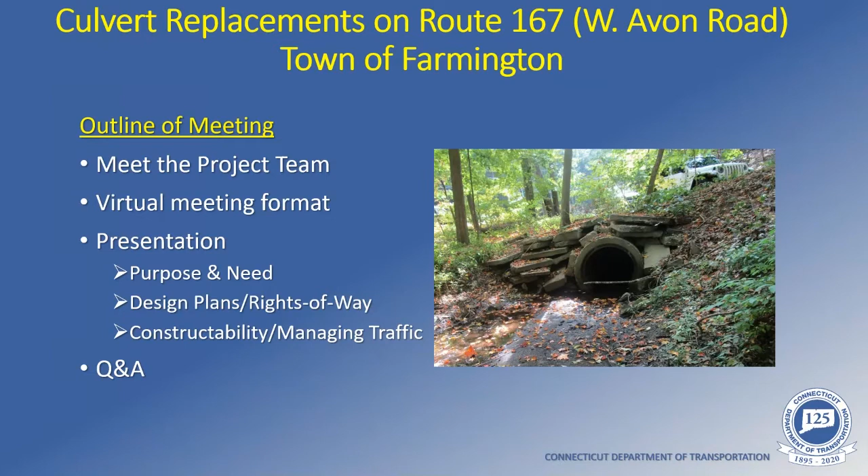The Department of Transportation representatives for this project are: top left, Mr. Matthew Vail, Principal Engineer, Highway Design; top middle, myself, Scott Bushee, Project Manager, Highway Design; top right, Mr. Matthew Giannakopoulos, Project Coordinator, Office of Rights of Way; bottom left, Mr. Byung Kim, Project Engineer, Highway Design; bottom middle, Mr. Albert Yelda, Project Designer, Highway Design.

An opportunity to ask questions will be held at the end of tonight's presentation. There will be 3 ways to submit questions to the project team: by email, by phone, and MS Teams chat. At the end of the presentation, I will cover the email address, the phone number, and procedures for using MS Teams chat to submit your questions.

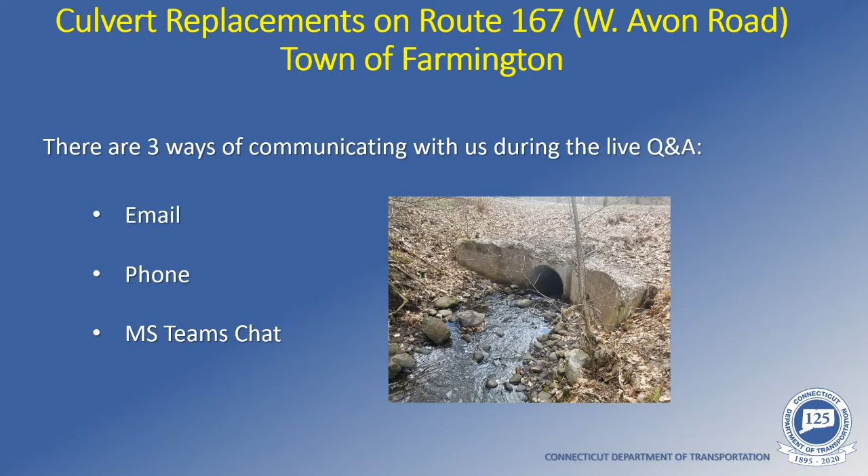The design of this project, including tonight's meeting, is being held in conformance with Title VI Civil Rights. We have a feedback survey that would be appreciated if you have the time to complete it following the meeting. It's located at www.surveymonkey.com/r/95JC8DT. We also have a civil rights flyer available with additional information if anyone's interested, which can be found on the DOT website. No person shall, on the basis of race, color, or national origin, be excluded from participation or subject to discrimination in the development of this project.

The culverts being replaced are located on West Avon Road, Route 167, just north of Route 4 in the vicinity of the Farmington Lions Club.

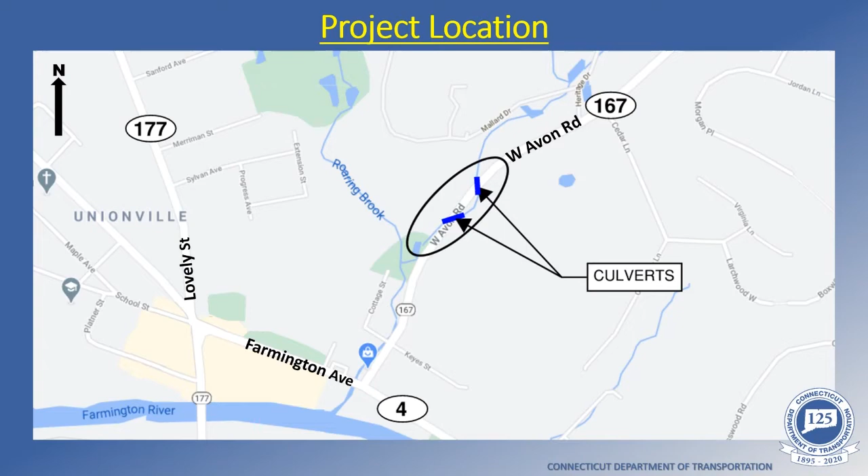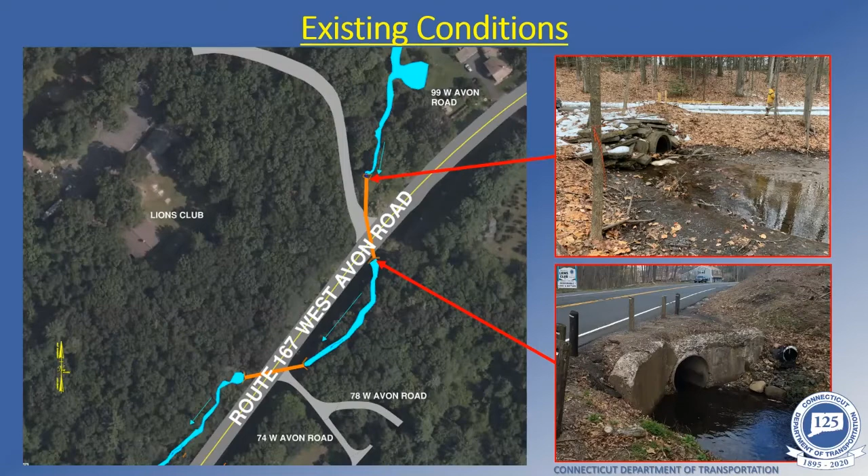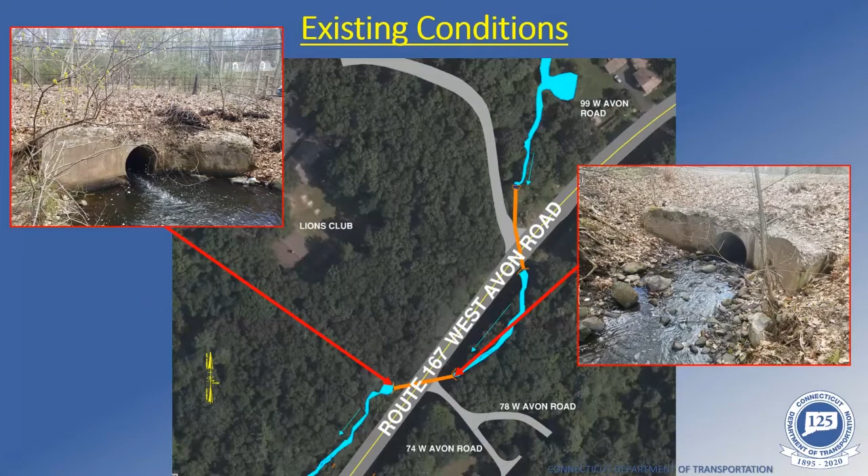The downstream culvert, the southern location, is in the vicinity of number 74 and 78 West Avon Road. This slide shows pictures of the culvert inlet and outlet, both head walls obviously spalled and deteriorated concrete needing replacement. This project is intended to alleviate the severity of the flooding as well as address maintenance needs.

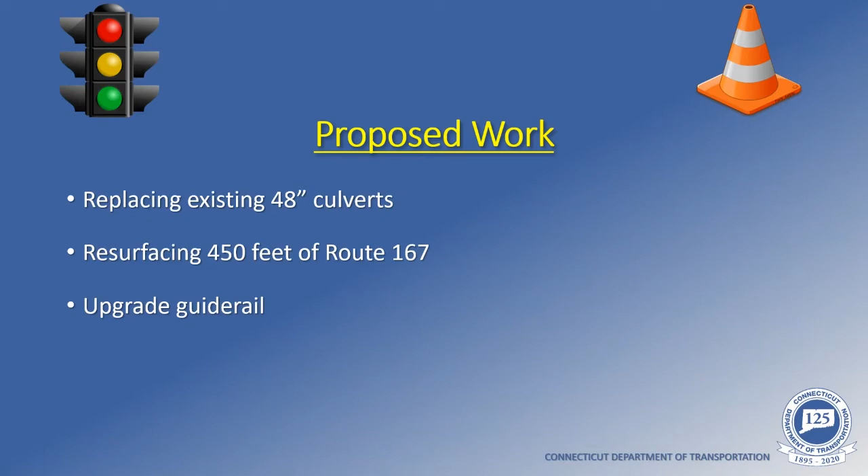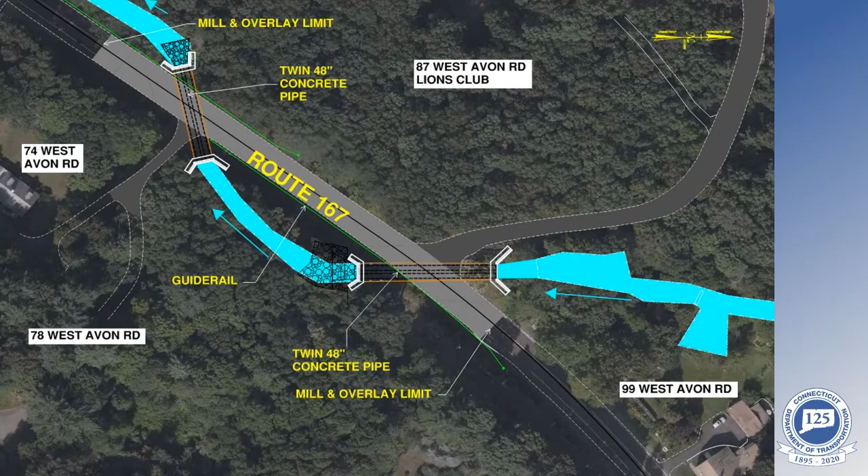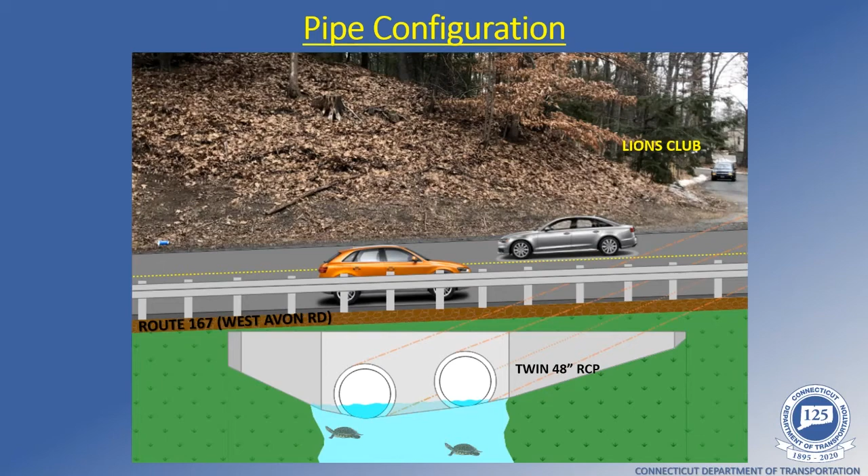The 2 48-inch culverts will be set side by side, significantly increasing hydraulic capacity. One pipe will be set about a foot lower than the other to create a low flow condition and better habitat for aquatic life. Roadside safety will be upgraded as part of this project by replacing the existing wood post cable guide rail with modern guide rail.

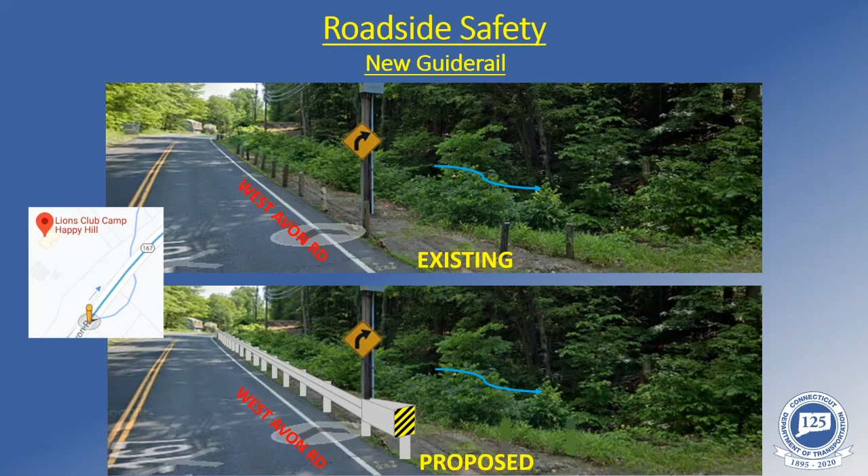The Department of Transportation is planning a detour in order to be able to accomplish this work. The large equipment needed to excavate the existing pipe and install the new pipe would use the bulk of the roadway width, making it very difficult for traffic to pass through the work area and us to work at the same time.

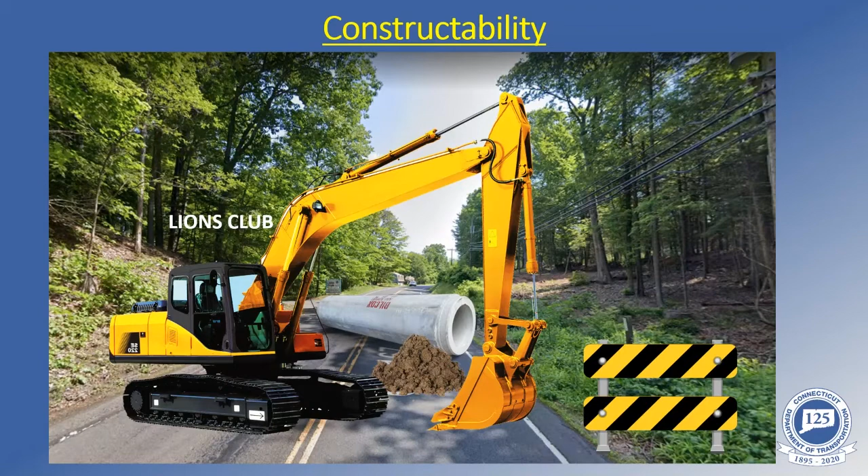Access to both driveways within the project limits will be maintained at all times during the detour from at least one direction: Farmington Lions Club, number 78 West Avon Road, and number 74 West Avon Road.

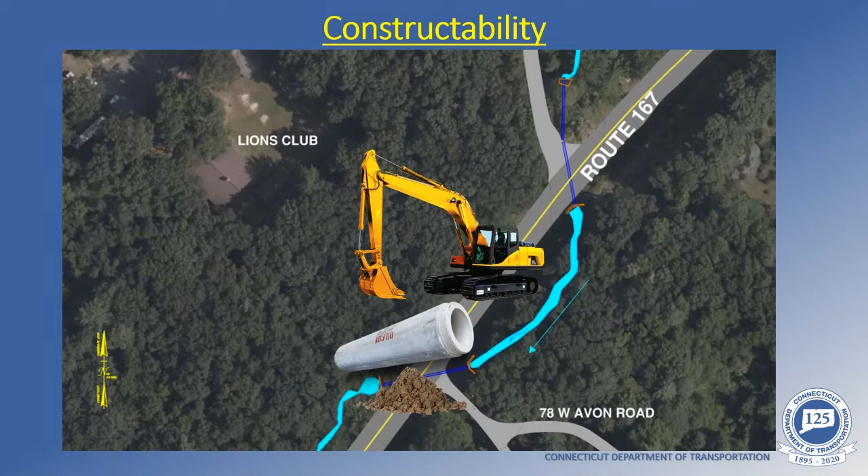Brickyard Road will be used as a detour to bypass the work area on West Avon Road.

The additional travel time is estimated at 7 minutes depending on traffic congestion, and it will result in an additional 4 miles of travel. The length of the detour is planned for 9 days, covering 2 weekends and the 5 weekdays in between.

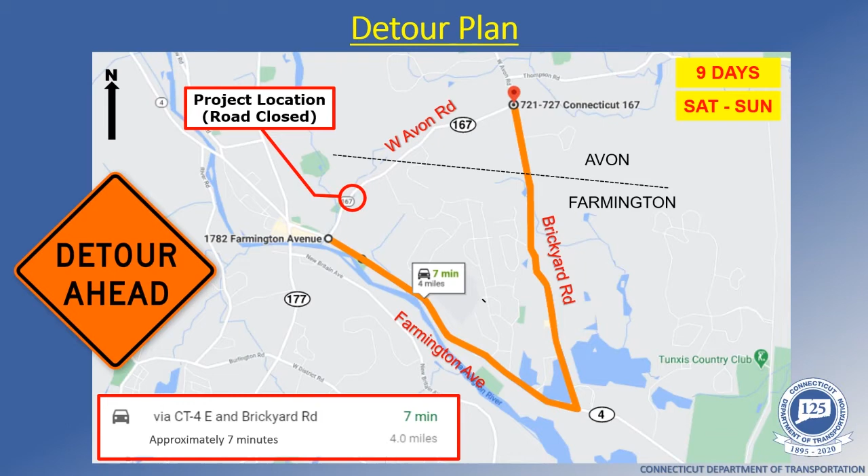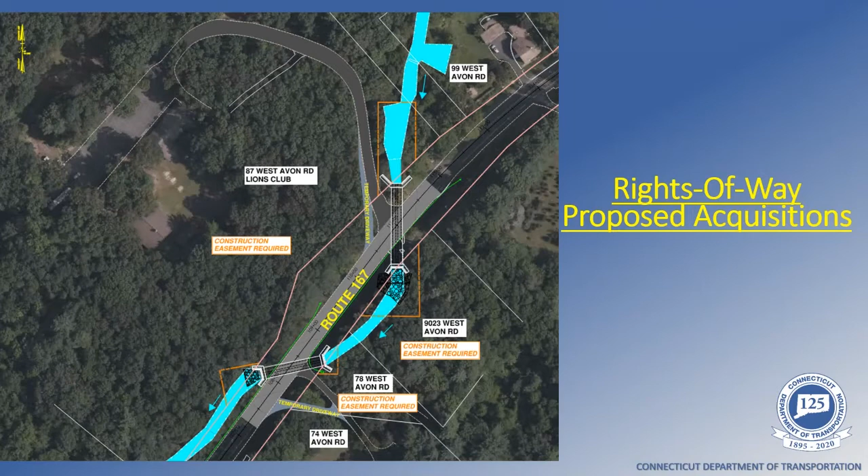The Department of Transportation will require the use of private property at 4 locations for placement of the culvert, constructability, and construction access. And now Matt Giannakopoulos, the department's right-of-way representative.

My name is Matt Giannakopoulos, and I am a project coordinator with the department's Division of Rights-of-Way. It is our office's responsibility to acquire the property rights needed for transportation projects. The proposed project design requires the acquisition of property rights, so I'd like to give a brief overview of the department's right-of-way acquisition process.

Please keep in mind, though, that the specific impacts are still being fine-tuned and may change as the design progresses. Any property rights that will be required will be acquired in accordance with Connecticut General Statutes Sections 13A-73 and 13A-98E. Whenever there is federal money used in any aspect of a project, the department must adhere to the Uniform Relocation Assistance and Real Property Acquisition Policies Act of 1970 as amended.

Once the design has moved to the point where we are ready to begin the acquisition process, each affected property owner will receive a formal letter of intent to acquire from our office, along with a property map which depicts the exact property rights to be acquired.

At that point, our office will determine the fair market value of those property rights and use that value to establish an offer of just compensation.

That offer will be sent out to the property owner in writing, and a right-of-way agent will be available to meet with the property owner and explain the project, go over the specific impacts to their property, and explain the state's offer. The property owner will have a reasonable time, typically at least 30 days, to consider the state's offer

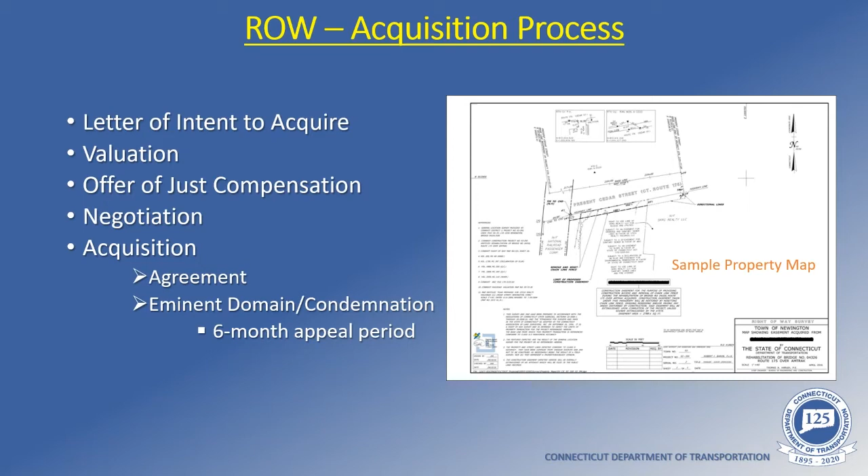If there are any questions regarding the department's right-of-way acquisition process, I'd be happy to address them once the presentation has concluded. The construction cost is estimated at $3.1 million.

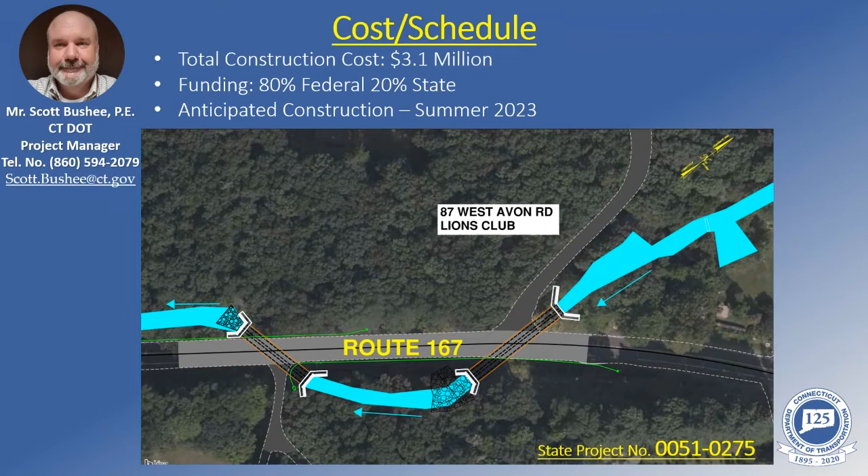The work will be accomplished using 80% federal funds and 20% state funds. The work is planned for the summer of 2023, when we will have low flow conditions in the stream and the best opportunities to manage the stream flow during construction.

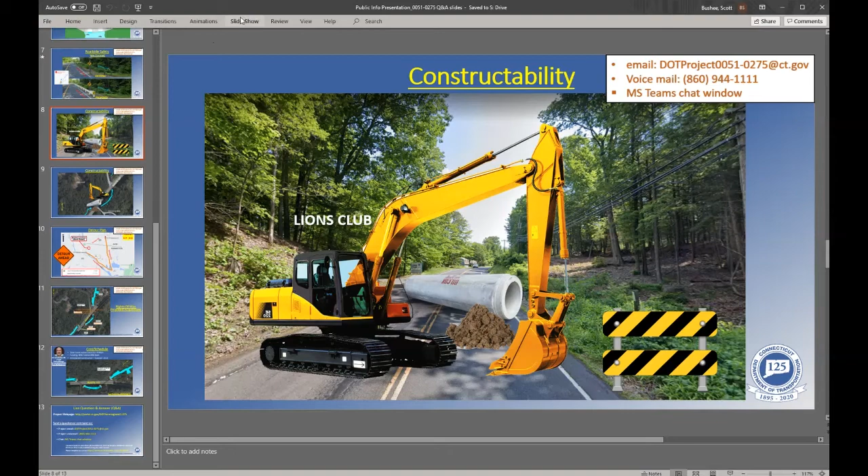We've been coordinating with utility companies on the project, and in order to construct the work, the utilities on the right side of the screen need to be moved so we can put in the head wall that goes underneath the wires on this downstream culvert. Utility work is going to take some time.

In addition, we've been coordinating with our regulatory agencies who issue environmental permits to us. The DOT is bound by environmental permits from DEEP, the Department of Energy and Environmental Protection, and also the U.S. Army Corps of Engineers, our federal partners helping us with the project. Under those permit requirements, when working within the stream, we're required to do the work during low flow conditions, which they mandate as June, July, or August. The time it takes to acquire the environmental permits gives us a very limited work window each year.

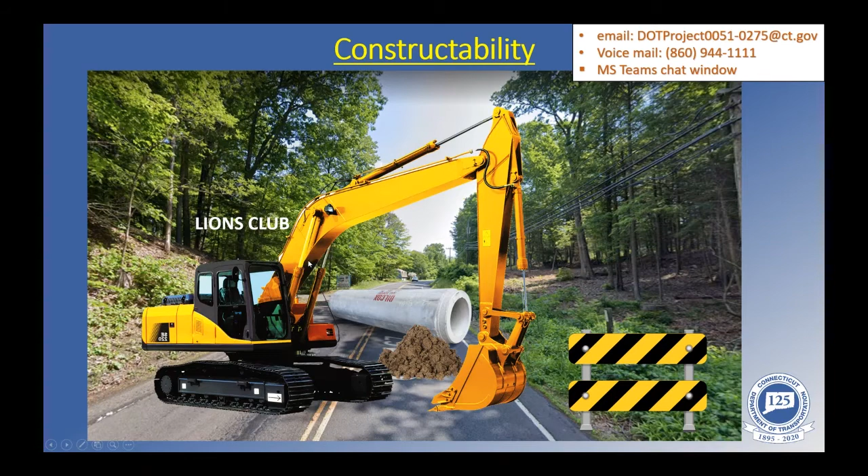At the position we're at now, we would not have enough time to advertise the project, secure the permits, and get the precast head walls completed during the summer work window of 2022. That pushes us into the following year. If you'd like to discuss this further with me after the meeting, I'll post my contact information again. Thank you for the question.

The next question in the chat: why are the pipes being replaced? The pipes are being replaced due to maintenance and flooding.

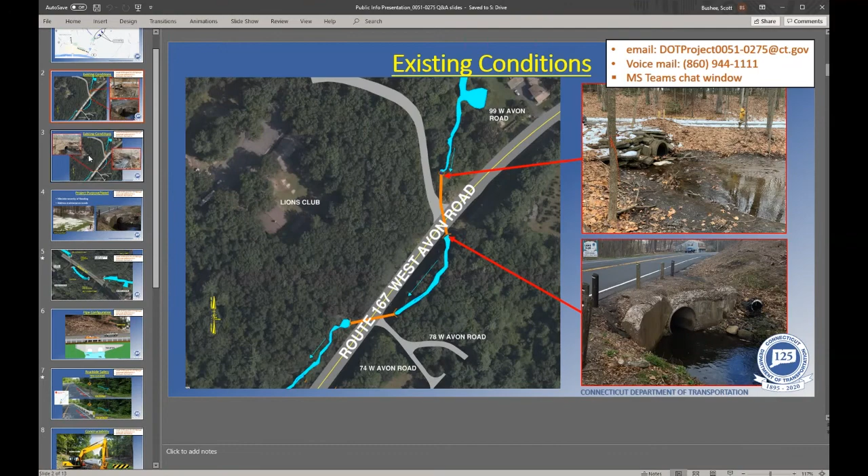If I go back to the beginning of the presentation, one of these slides will help me answer the question. The pipes are estimated to be in excess of 75 years old. They're well beyond their design life and service life. We've essentially got our money's worth out of these culverts years ago. And if you look at the concrete and the head walls, it's spalling, obviously in need of maintenance replacement.

At the upstream culvert, we've got flooding that's been occurring on a pretty regular basis, and the level of flooding is pretty severe. It's at a point where you can see the Lions Club driveway in the back, which is almost at the level of West Avon Road. So the flooding is not far from overtopping the state highway. It's a significant need to address replacement of the culverts due to maintenance, and as long as we're doing that, increase the hydraulic capacity to improve flooding conditions and maintain passability of the state highway during a severe storm. Thank you for the question.

The next question on the chat is: what hours will the contractor be allowed to work during the closure? Okay, thank you for that question.

I had mentioned the DOT was going to go to a detour in order to construct the project. We want to do that work as efficiently and quickly as possible to minimize the duration of the detour. At the moment we've got 9 days, and we're pretty comfortable we can replace both culverts during that work window. That's going to force a fairly aggressive schedule on the part of the contractor.

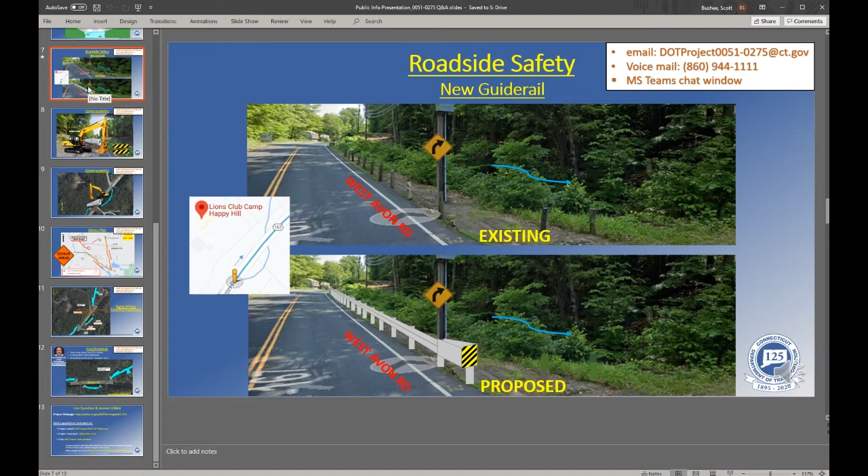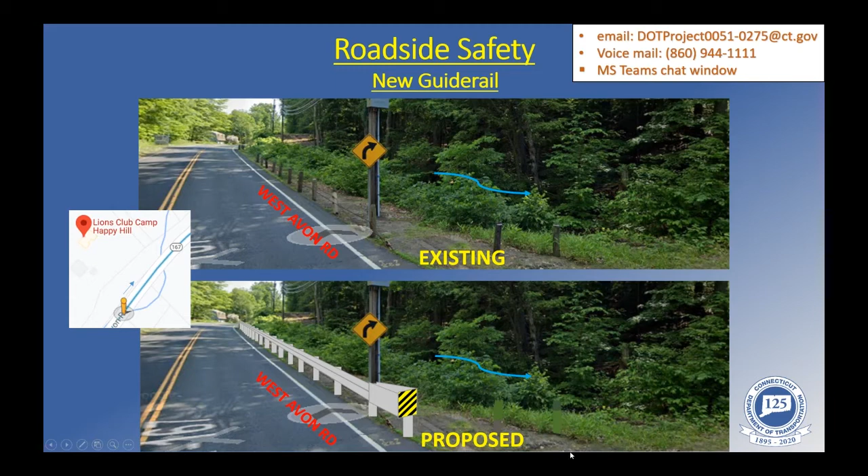Thank you for asking that question, it's something we're currently working on. With the initial design we had on the culverts, if you can see where my arrow is, this is where the culverts are going to go, right underneath the corner of that driveway. This railing, the metal posts extend pretty deep, so our standard guide rail design that would tend to wrap around the driveway wasn't working, and we're having to come up with a customization to make that work. We're in the process of doing that, and I have confidence we'll be able to get that to work as a final product when the contract goes out. But for now, we had left the guide rail here with an impact attenuator just short of the driveway, though we do plan to correct that with a customization to our standard to get it to wrap around the driveway. Thank you for that question.

The next question we have in the chat: will we still have access to the Lions Club?

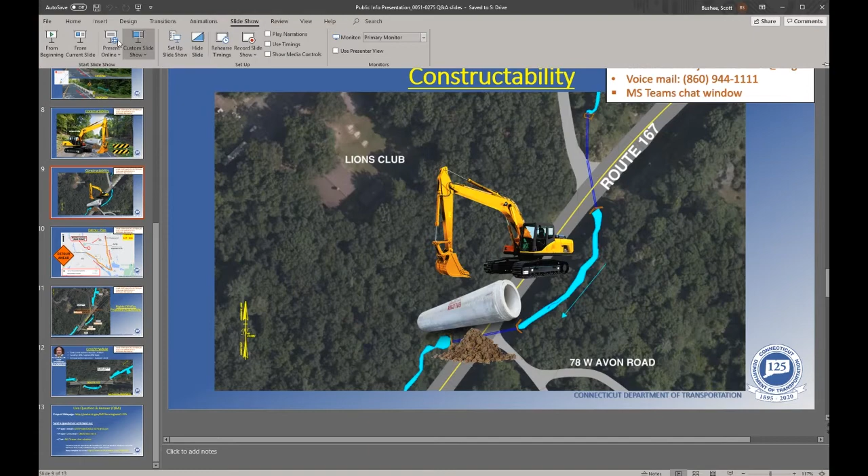Yes, the answer is yes, and thank you for that question. All three properties within the limits of the work—the Lions Club, number 78 West Avon Road, and number 74 West Avon Road—share a common driveway. All properties within the project limits will have access at all times.

It may be a gravel travel path, one lane wide, and it may be from only one direction. There may be times when you can only get in from the south because this part of the road is completely excavated, or only from the north because of where equipment is parked and where the contractor's working. But part of the contract requirements will be to maintain access at all times, with at least one lane width into the Lions Club and into the shared driveway. Thank you for the question.

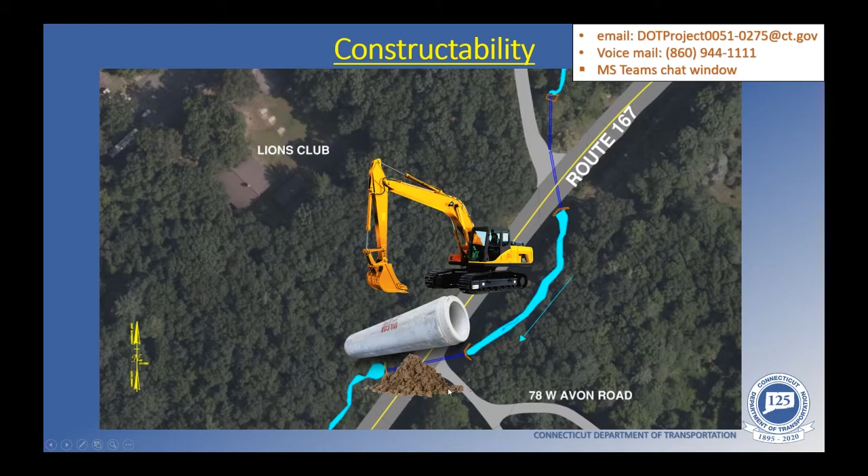Next question: what can be done between now and 2023 to mitigate the erosion of the stream and the flooding levels?

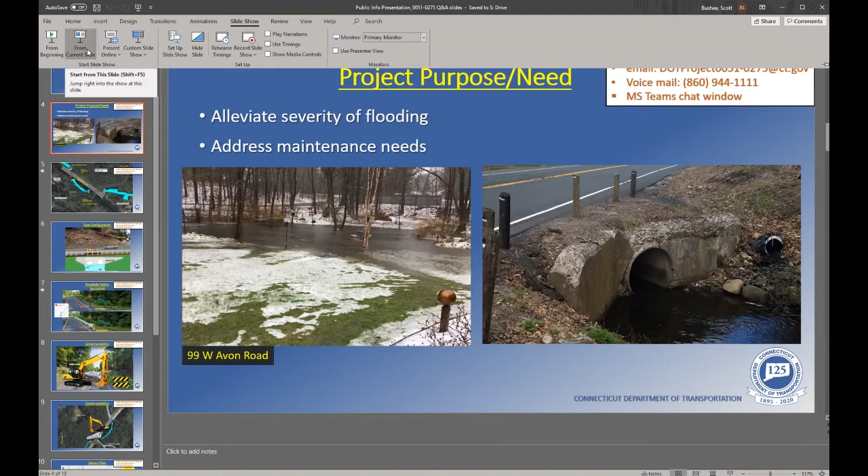Thank you for the question. The answer is monitoring. We'll monitor it, and if we see something significant occurring—the good news is we've got the design well underway. We've got the pipe sized hydraulically. We're in the environmental permitting process, and we're working to acquire the rights of way needed to install the pipes. So if we were to get into an emergency condition, a severe storm, something like that, and had to address this immediately, we have the design, we know what the pipes need to be, and we could get emergency authorization to address this immediately if that opportunity came about. But at the moment, this is not at emergency status. Thank you for the question.

Thank you for the question. Again, if you want to talk with me further about that, Scott Bushee, my phone number is 860-594-2079. I'm happy to come out and meet with you at your property and discuss further.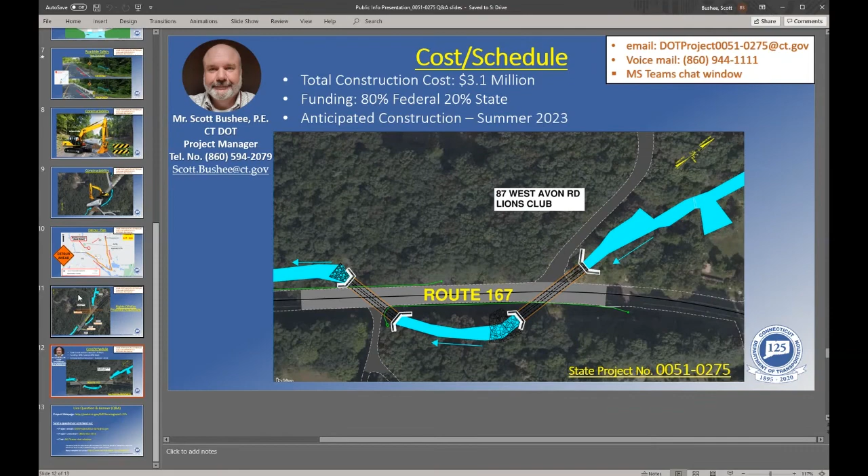We'll give it just a couple more minutes and see if any more questions come in. I'll put up the slide showing the final condition, just a quick review while we're waiting. So here's the final condition. We're resurfacing the road, this gray area here.

We're going to be putting in 48-inch pipes, two of them placed side by side. That almost doubles the hydraulic capacity that's there today; the existing pipe's only a single 48. So that will alleviate the flooding. These culverts will be there for many, many years to come, likely much longer than the existing ones that are there now. That will leave this area in a state of good repair. We shouldn't see the flooding anymore.

All the guide rail along the roadway is going to be updated with modern metal guide rail. And the intent is, yes, we're working to wrap this around the driveway. We don't have those details resolved yet, but that is our plan.

The work will be done under a 9-day road closure. Here's the detour plan. The detour uses Brickyard Road to bypass the work area on West Avon Road. As I mentioned earlier, we'll be putting out changeable message signs at each end of Route 167 - these will be the big black signs in the trailer with the lights on them that have messages. These will be posted about 2 weeks before we start the detour, and it'll have the initial start of the detour and intent of reopening the roadway.

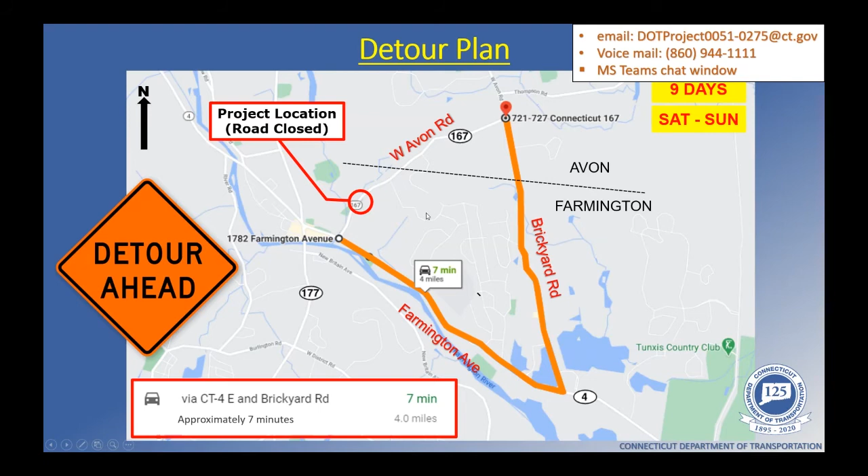Albert, we got another question in the chat: what about re-landscaping the area once it's completed? That's also something we have in the works.

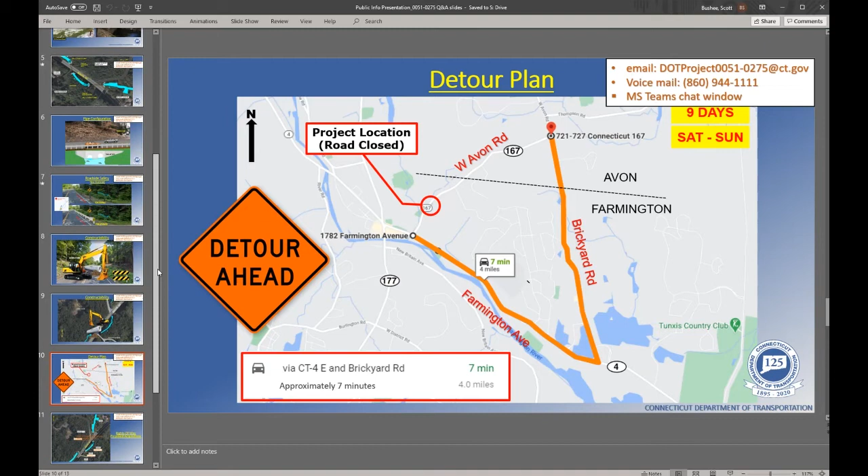Let me take a second to go to the slide. That's part of our environmental permitting process, and we will be replanting these areas around the head wall, at the inlet and outlet of the stream. So areas where vegetation is removed to construct these new culverts on each end, we'll be doing some restorative work in these areas. The landscape design plan is something we would have much later into the design process. At the point we're at now, we call this 30% design.

We intentionally don't go too far with the design effort, so that when we come out to the public involvement process, there's still plenty of opportunity to include your comments and things you might want to do with the project. It wouldn't be advantageous for us to bring this to a 90% design effort and then come out and say, hey, what do you think?

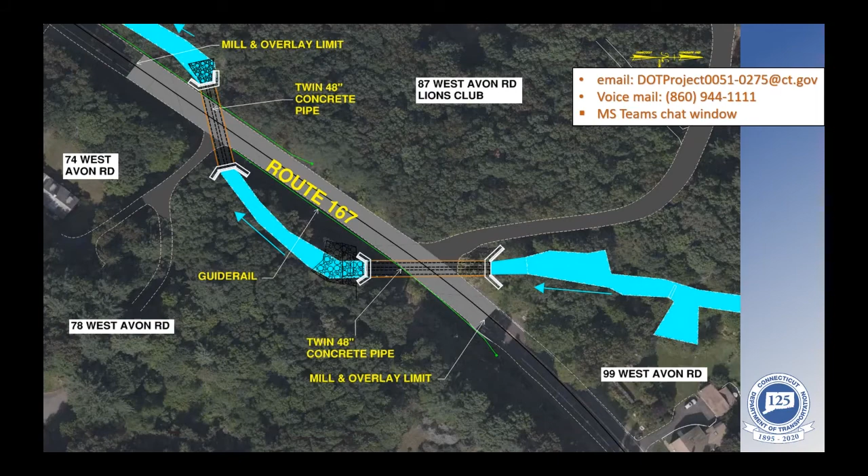We'd like to get out and talk with you early and address your concerns before we get too far along. Landscaping is definitely going to be part of the project as a restorative effort when the culverts are completed. If you're interested in seeing the landscape plan or working with us on it, just retain my contact info and send me an email when we have the landscape plan available. It's going to be quite some time from now, but I'd be happy to share it with you.

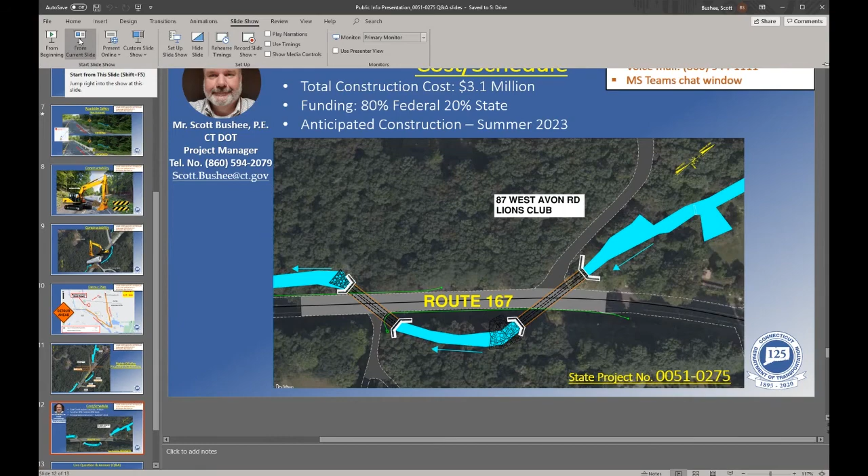Any more questions, Albert? Doesn't look like it right now.

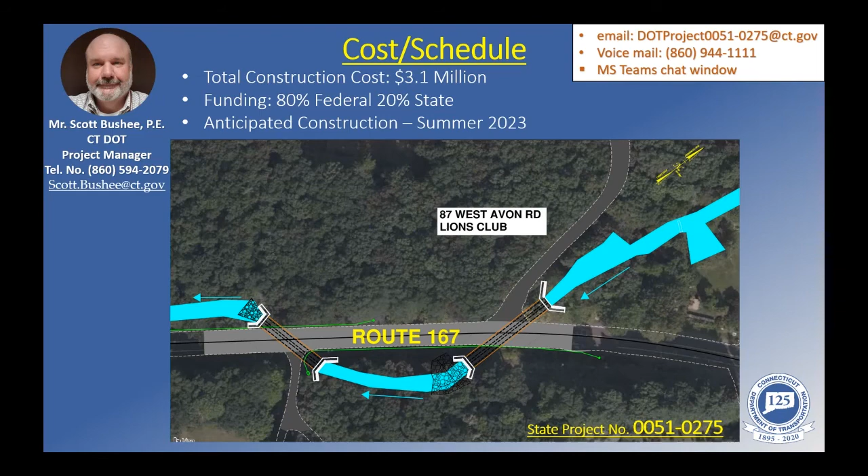Thank you for that question. I don't have an exact elevation as far as a number to give you in the presentation, and if that's something you actually need the survey information for some reason, please write in by email, and I'll get you the coordinates for the head wall, exactly where it's going to go, and I can get you the elevation.

But the important part of the question I want to answer and make clear is that as far as hydraulic capacity, we will be doubling the size of the existing culvert by making this twin 48-inch pipes. The existing one is only a single 48-inch pipe. We're going to be putting back two, and one of these pipes is going to be set 1 foot lower than the existing pipe. The reason for that is to increase low flow in the pipe and in the adjacent stream sections during the summertime.

We want to make sure we have adequate depth in these areas. By reducing the elevation of one of these pipes a foot lower than the other, that's going to allow for a depth of flow in the stream and will be better for any aquatic life in the area. That's something we work on with the DEEP Fisheries and U.S. Army Corps of Engineers, and also U.S. Fish and Wildlife, who are all part of this process. That's something we've already agreed to with them in our preliminary permitting work.

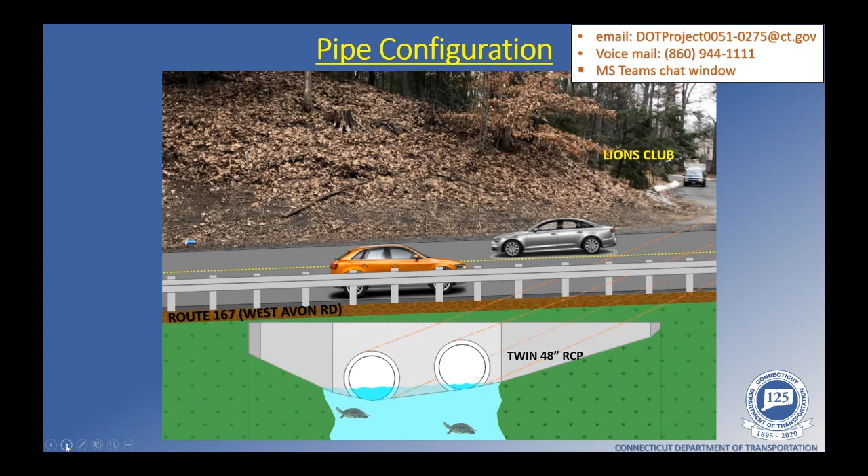Any more questions, Albert? Doesn't look like there's any that are coming in.